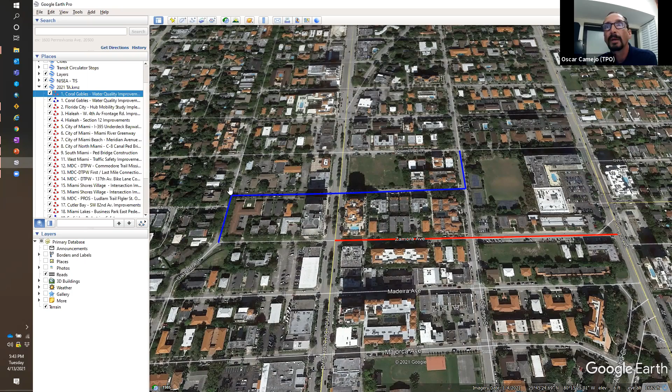Applicant number 2 is the City of Florida City, further south. This is essentially where the eventual BRT will end on Palm Drive. Florida City recently conducted a study through the TPO, a Mobility Hub Study, and identified challenges to accessibility and connectivity in the area immediately surrounding the Florida City Bus Rapid Transit Station. This project will address short-term quick fixes that can significantly enhance safe access to the station, focusing on the transit core with priority given to improvements near schools. They too asked for $1 million, and they're contributing $700,000 themselves.

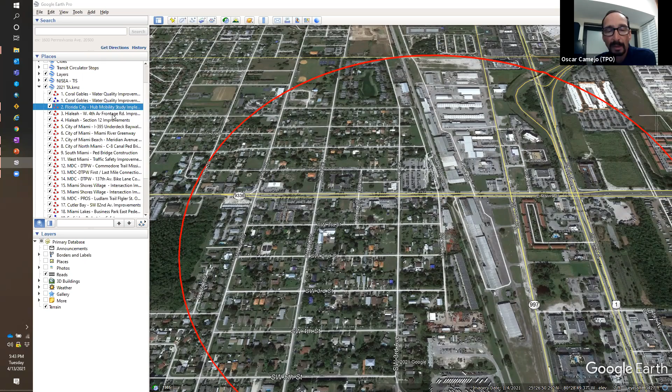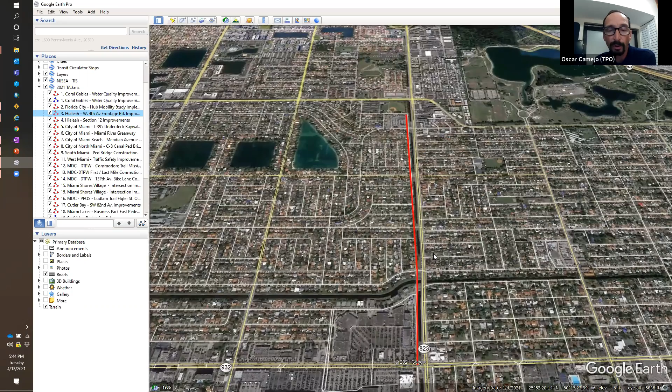Applicant number 3, City of Hialeah, my old stomping grounds. West 4th Avenue frontage road pedestrian and bike lane improvement: add a sidewalk on the east side of West 4th Avenue along the canal and provide a bike share lane from West 49th Street to West 66th Place. The funds requested are $765,000, and they'll be contributing an additional $140,000 or more, for a total project cost of $918,000.

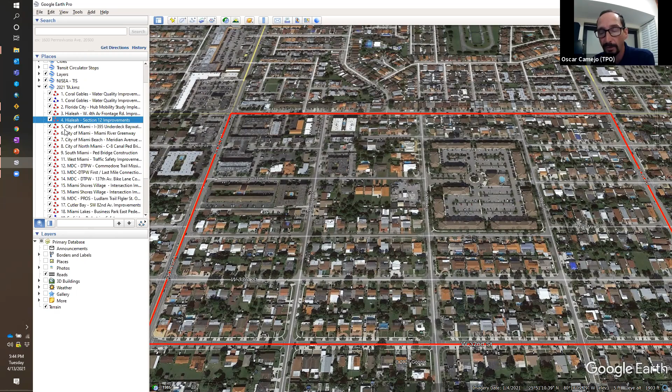Applicant number 4 is also the City of Hialeah, section 12, subsection of their planning development, this big square, sidewalk improvement. Add sidewalk and ADA ramp improvements on all corners from West 12th Avenue to West 8th Avenue and from West 32nd Street to West 37th Street, that quadrant shown here. They're asking for $252,000 and contributing an additional $50,000, for a total of $302,000.

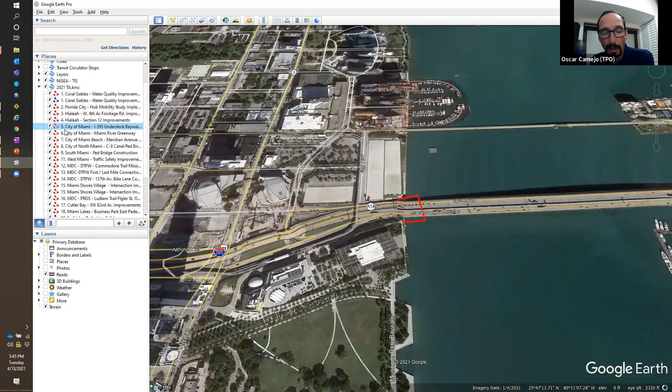Applicant number 5 is the City of Miami. This applicant submitted the I-395 underdeck Bay Walk connection, Northeast 13th Street from Biscayne Boulevard to Biscayne Bay, to connect the underdeck and Heritage Trail to the Bay Walk. The City of Miami intends to expand the lease agreement with FDOT to provide the connection from the Bay Walk to Northeast 13th Street. The connection will be a wide path with landscape elements to provide a safe and attractive connection to the sidewalk. They're asking for $608,000 toward a total of $914,000 project. Someone at a previous meeting asked if it goes over or underneath the highway - it goes underneath.

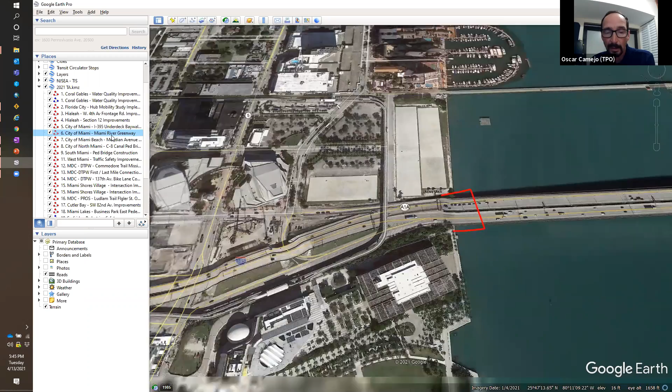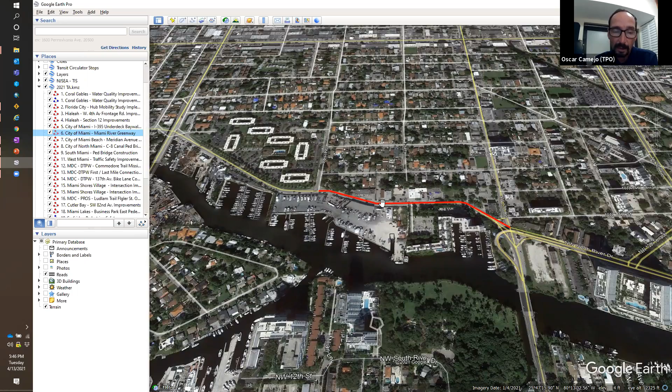Number 6 is also the City of Miami, the Miami River Greenway, Northwest 19th Avenue to Northwest 17th Avenue. It will provide a publicly accessible pathway for bicyclists and pedestrians in concert with the roadway reconstruction of Northwest North River Drive. This public pedestrian and bicycle trail along the historic Miami River will connect diverse multicultural neighborhoods, public parks, residences, historical sites, businesses, and cultural attractions around the waterway. They're asking for $1 million of a $3.9 million total effort.

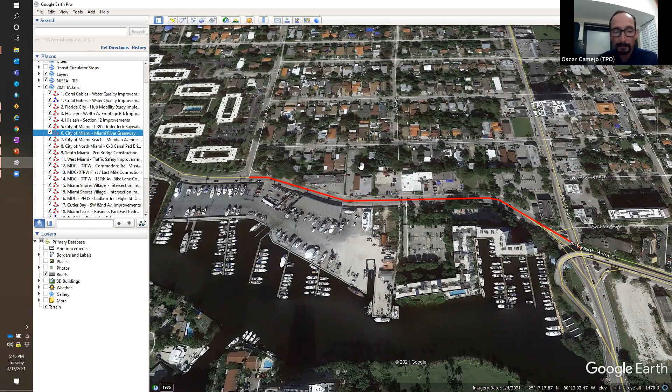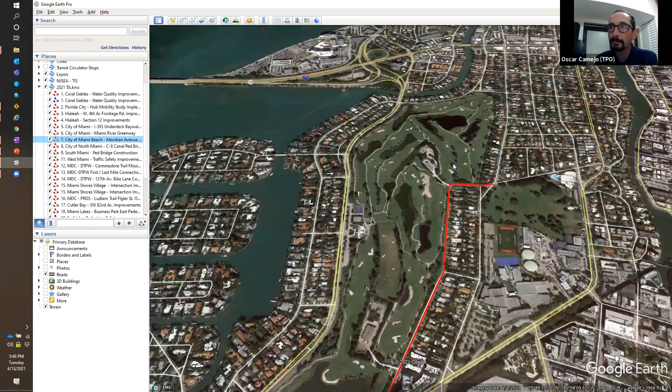City of Miami Beach, applicant number 7, Meridian Avenue Shared Use Path, to enhance the bicycle and pedestrian network in Miami Beach in compliance with the adopted bicycle pedestrian master plan. The project consists of final design and construction of a 10-foot shared use path on the west side of Meridian Avenue from Dade Boulevard to 28th Street. They are seeking $701,000 for a project estimated to cost $843,000.

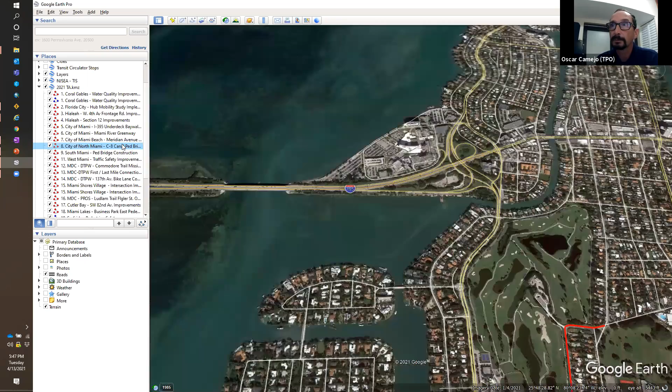Applicant number 8, City of North Miami, titled Pedestrian Bridge Replacement over C8 Canal, also called the Biscayne Canal. This replaces the existing pedestrian bridge over the South Florida Water Management District C8 Canal. The existing bridge is located between Northeast 2nd Avenue and Griffing Boulevard, approximately 1,400 feet south of the existing Northeast 135th Street vehicular bridge. They're asking for $700,000 of the $800,000 total project cost.

Applicant number 9, City of South Miami.

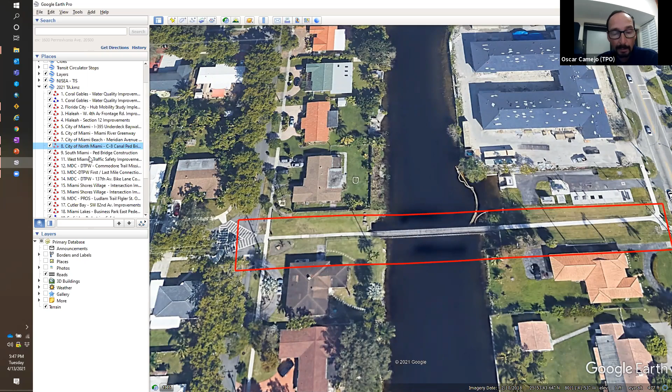This is the South Miami Bridge construction to provide a safe elevated route for non-drivers to travel between the northwest and southeast sides of a 6-lane arterial US 1, through the development of a pedestrian bridge. They're asking for $400,000. The total project cost is $5.4 million. They've received money already before through this program to do the other parts of this effort.

Applicant number 10 is also City of South Miami. However, we don't have an area for them because it's a culvert replacement on Southwest 64th Court over Twin Lakes Canal, to replace the structurally deficient corrugated metal pipe culvert located there in South Miami with a new structure, thus providing greater connectivity between the Manor Lane neighborhood and the existing Metro Rail and businesses in the area, and promoting pedestrian safety. They're asking for $1 million of a $1.25 million effort.

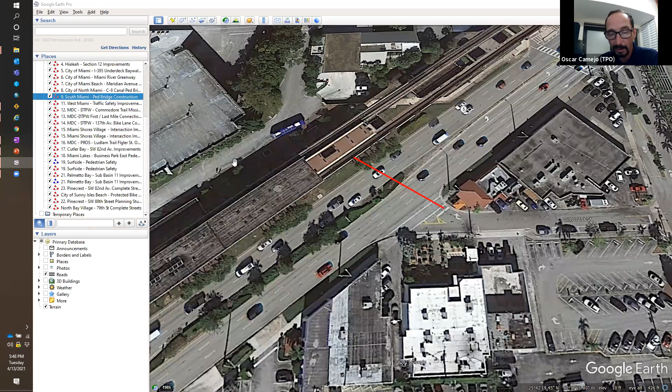Applicant number 11, City of West Miami. West Miami traffic safety improvements to implement the recommendations of a Smart Move study, which assessed traffic and crash conditions in the city at various locations. The project will also improve safety to and from the elementary school by adding traffic circles and crosswalks. They are seeking $415,000 of a $508,000 total project cost.

Applicant number 12, which is the Department of Transportation and Public Works. Commodore Trail missing link, road diet and buffer lanes along South Miami Avenue to improve safety and connectivity for bicyclists that use the Commodore Trail for commuting and recreational purposes. The Commodore Trail is a highly active trail that extends from the Cocoplum Circle in Coral Gables to Alice Wainwright Park. DTPW is asking for $999,000 for this.

Applicant number 13, also Department of Transportation and Public Works, or DTPW. First last mile connection to the Aventura Brightline Station and the Aventura Bus Terminal, to provide bicycle connectivity along West Dixie Highway to the station and terminal. It also aims to improve bicycle travel from Oleta Park through the city of North Miami Beach to Reynolds Park, to the Miami-Dade Broward County line. DTPW is asking for $1 million of a $2.2 million effort.

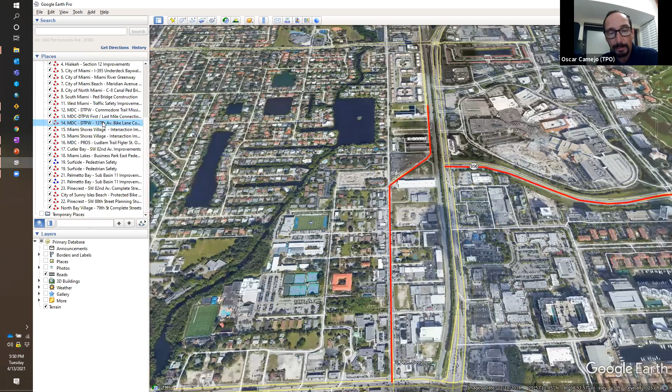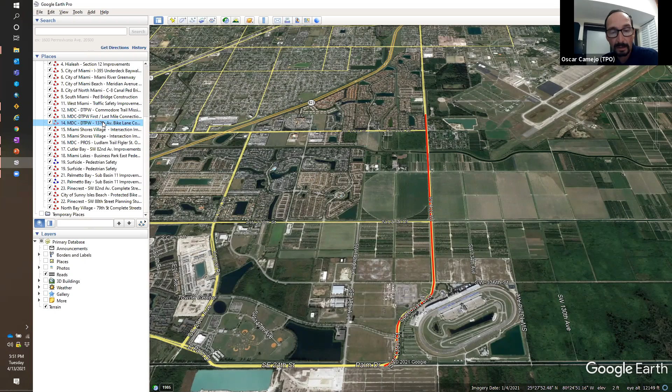Applicant 14 is also DTPW. Highlighting conflict points along Southwest 137th Avenue bicycle lanes, from Southwest 344th Street to Waterstone Boulevard, approximately Southwest 309th Street, while improving the riding surface for cyclists and vehicles. Southwest 137th Avenue is a multi-lane road with a posted speed of 40 miles per hour. They are seeking $943,000. Number 15 is Miami Shores Village.

Intersection Improvement Project: improve ADA compliant crosswalks along the village's local roadways, to improve pedestrian safety along the two main roadways within the village that lead to local schools and a community park. They are seeking $200,000 of a $218,000 effort.

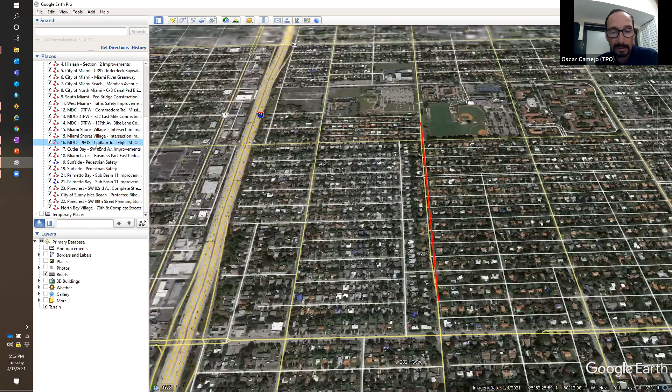Number 16 is Miami-Dade County Parks, Recreation, and Open Spaces Department, or PROS. This is the Ludlam Trail West Flagler Street Trail Overpass, to construct a shared use bridge overpass across West Flagler Street, Florida Department of Transportation right-of-way located west of Southwest 69th Avenue along the Ludlam Trail corridor. The proposed bridge will span approximately 100 linear feet. They're asking for $1 million of a $14 million project.

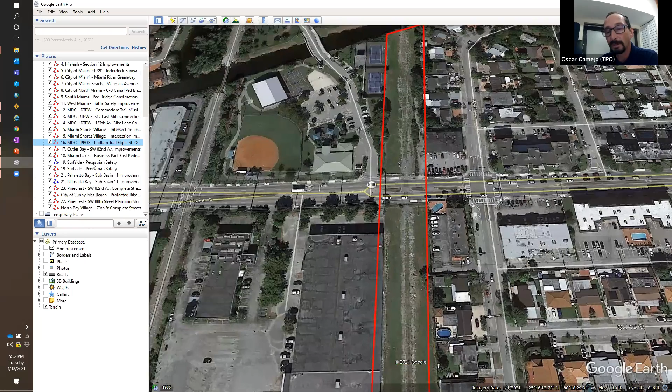Number 17, Town of Cutler Bay. Cutler Bay Southwest 82nd Avenue roadway improvements, to implement traffic calming techniques along Southwest 82nd Avenue from Southwest 184th Street to Old Cutler Road. Plan improvements include the installation of one traffic roundabout, improved drainage as required, new sidewalks to eliminate gaps along Southwest 184th Street, ADA ramps, and painting of bicycle sharrows along the project path. They are seeking $800,000 of a $952,000 effort.

Applicant number 18, Town of Miami Lakes. Miami Lakes Business Park East Pedestrian and ADA Improvements Phase 1 project. Design, permit, and construct new 6-foot sidewalks and pedestrian safety related infrastructure in compliance with the Americans with Disabilities Act, to safely connect people to jobs and industries via shared use path on Northwest 139th Street from Northwest 60th Avenue to Northwest 57th Court, northward to Northwest 142nd Street, including Northwest 59th Avenue, Northwest 58th Court, Northwest 58th Avenue, and Northwest 57th Court. They are seeking $994,000.

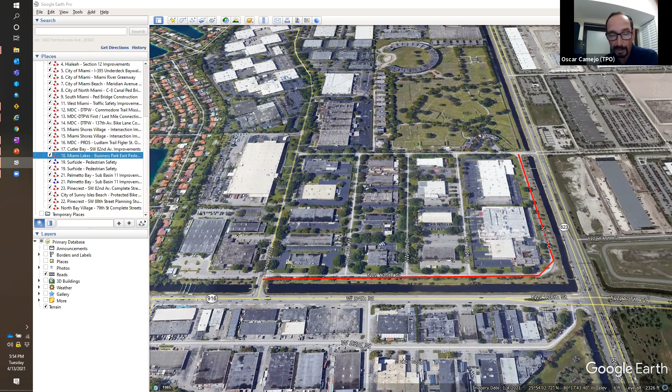Number 19 is the Town of Surfside. This is the pedestrian safety infrastructure improvements to improve and enhance pedestrian crossing locations in the town of Surfside. Specifically, signalized lighted crosswalks and lighted signs per MUTCD at State Road A1A, Harding Avenue, and 89th Street and 90th Street intersections circled there. They're seeking $1 million of a $1.2 million effort.

Applicant number 20 doesn't have a Google Earth because it's a University of Miami School of Medicine and it's a county-wide effort. Sustainability and expansion of the Walk Safe and Bike Safe programs for K through 8th grades in Miami-Dade County. Educate elementary and middle school age children and families on the importance of walking and bicycling safety and injury protection, to sustain and expand the programs countywide. $903,870 is what they are requesting.

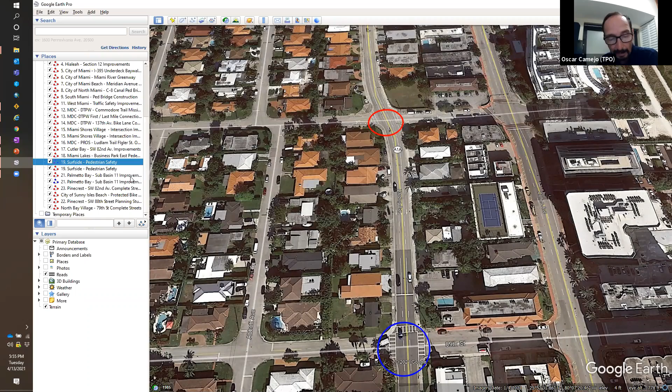Applicant 21, Village of Palmetto Bay.

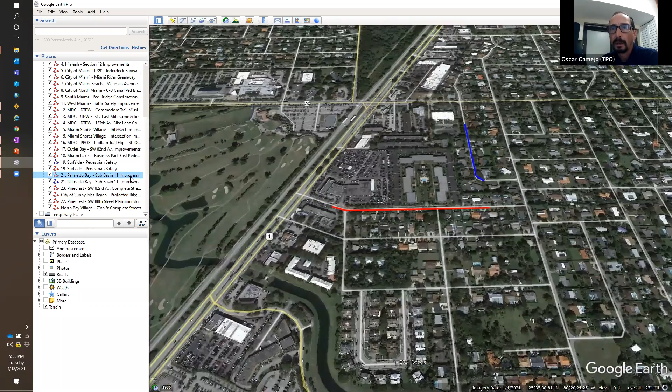Palmetto Bay Subbasin 11 improvements help eliminate flooding to specified roadways and connected side streets in the Village of Palmetto Bay Subbasin 11, which is roughly a 48-acre area of single-family homes and commercial development. They are seeking $1 million of a $1.5 million effort.

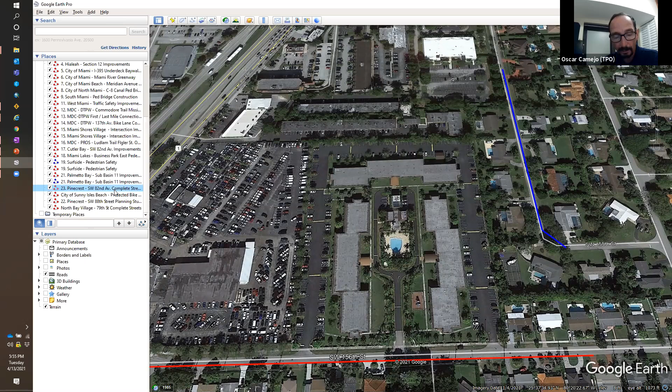Applicant number 22 is the one that was withdrawn by Village of Pinecrest. And applicant 23, also Village of Pinecrest, is Southwest 82nd Avenue.

This is a Complete Streets Planning Project to conduct a planning process with residents and stakeholders on the best form of complete streets for this corridor on Southwest 82nd Avenue from 120th Street to 136th Street. They are seeking $75,000 for that effort.

And that completes my description of each of these applicants. I do have the complete packages here, and of course they're available online if anyone has any questions.

Kevin, can I ask you a question? Go ahead, Hank. I apologize for coming in late, and hello to everybody, thank you for letting me get back on the BPAC after I resigned. It's good to be back. Yeah Kevin, we even had a slide for you at the beginning of the meeting, but you missed it, here it is now. Oh, thank you.

Kevin, it's no secret that I have a very prominent interest in the Commodore Trail. So how do we handle this? Am I allowed to vote on any of these, just not vote on the Commodore Trail? What's the procedure? That is a good question. I'll give that to Oscar because he's been doing this. I do not know if we have anything where somebody has to recuse himself because of personal interest. How have you done this in the past, Oscar?

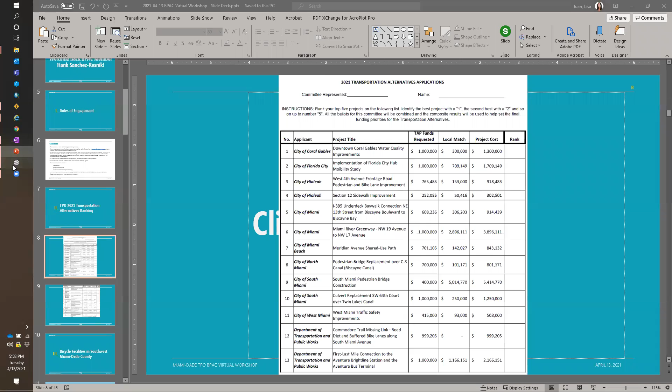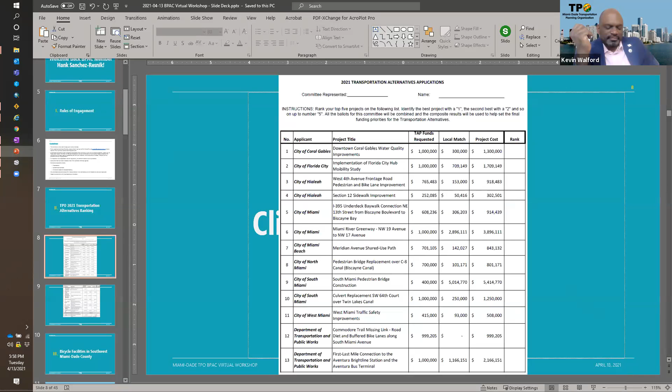Anybody have any questions? Brett? I know Eric sent his comments in, but for the record, Eric, I'd still like you to at least mention some of them at the workshop. Brett, you're going to say something? No sir, I have no questions at this time. Thank you for the opportunity.

And you saw that the application materials for the Miami River Greenway project were available for you to pick up, correct? Yes, and I appreciate that.

Okay, so if everybody could please fill out their forms and send them to Kevin tonight at the latest. Unfortunately we tried to get this in at the last meeting, but we didn't have the Google Earth ready, and today's the deadline, so if you guys could send those in, it would be greatly appreciated.

And remember, you only have to rank the top 5, you don't need to rank all 22. Just vote: your favorite one gets a 1, your second favorite gets a 2, and so on until you rank 5.

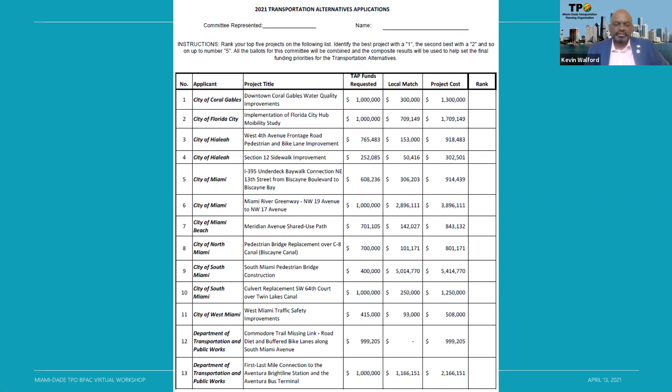Let me just double check to make sure nobody else has joined the meeting. No, it's still the same 3 members so far: Eric, Hank, and Brett. Okay, so once I receive... you only need to be present to participate? You do not need to be present to participate since you sent them out earlier anyway. No, everybody was told they had until today at the meeting or afterwards, so whatever emails I get tonight before midnight, those will make it in.

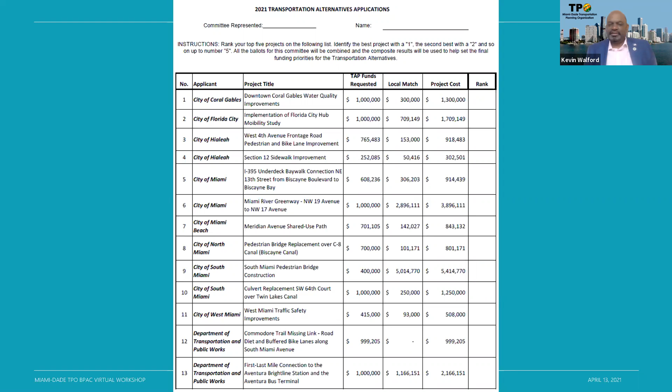All right, thank you, then no other comments being asked. Thank you very much, Oscar. Thank you, all right.

Next, we have bicycle facilities in Southwest Miami-Dade County by Eric Tolberg, who's one of our BPAC members. All right, so Eric and Lisa, you take the technology.

Eric, would you like to start sharing your screen? I believe I have, hold on, let me. Can you see anything yet? No, not your screen yet. Sorry, I have to get out of it. I can't kill it. Let me stop sharing and then you can start sharing your screen. Oh, here, end show, I've got it. Okay, share screen.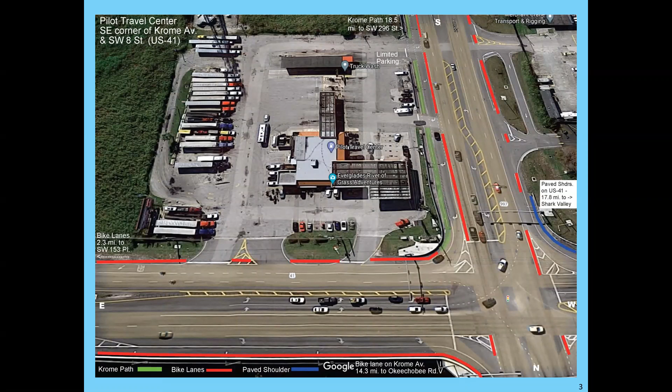This is Kendall Drive. This is the view west from Southwest 88th Street, 500 feet east of the Krome Path. Notice the very narrow shoulder on the side of the road, which disappears at the guardrail, and there's no place to park at the shoulder. Now, I understand there are plans to build a sidewalk or path on the south side of the road, but there's no place that you can access the Krome Path yet.

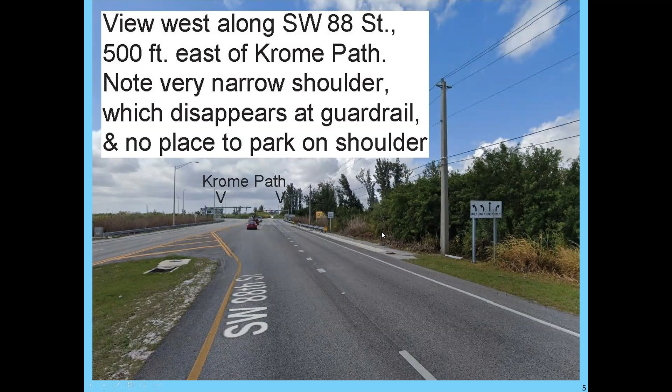This is the view west from Southwest 157th Avenue along the gravel road south of the C1W Canal, which is 2 miles to Krome Path. No parking is allowed at the entrance right here. There's a 35-inch gap next to the gate.

This is West Kendall District Park on the left. It has a paved jogging path and grass parking area that you can use to park to access the Krome Path.

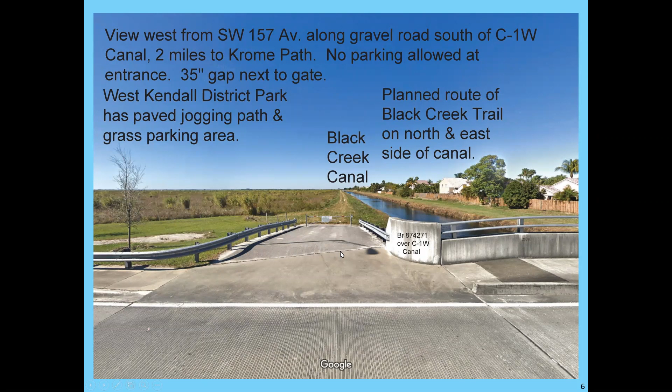This is an aerial view of the West Kendall District Park. Notice the grass parking area over here. You can put a lot of cars there and then take the jogging path up to the gravel path that goes to Krome Avenue. So if you've got a lot of people that you want to have a ride, you go onto the Krome Path - you park on this grass parking area just off of 157th Avenue, and you can access the gravel road to Krome Path.

This is next to the C1W Canal. This is very close to Southwest 120th Street and roughly in line with 112th Avenue, 112th Road.

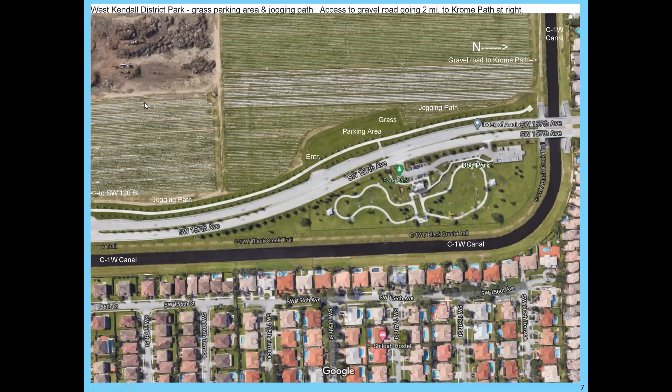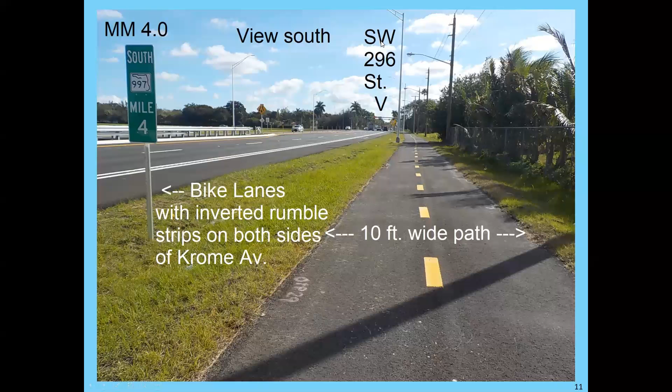This is Southwest 296th Street where the path ends. And this is the end of the path at 296th Street. There is a rebuilt sidewalk to Southwest 312th Street, but unfortunately, the bike lanes from this point to 312th Street were removed when Krome Avenue was widened.

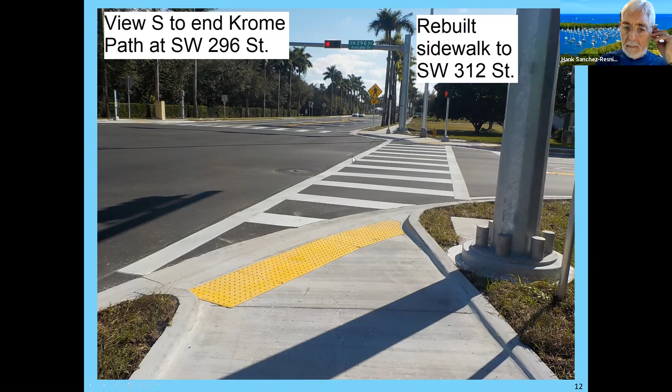These are some other bike facilities in southern Miami-Dade County. Can you see the A there? That is Southwest 328th Street. It's 1.4 miles from US 1 to Southwest 162 Avenue, and that has both bike lanes and sidewalks. The second one is B, which is only 0.4 of a mile long, which also has bike lanes and sidewalks. But this is important because it is part of the Biscayne Everglades Greenway.

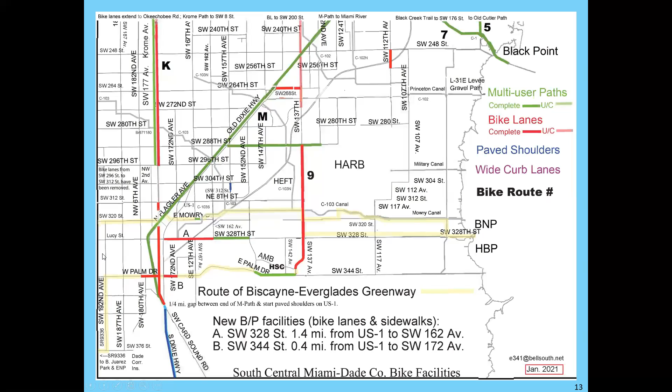The Biscayne Everglades Greenway path is shown in yellow, and you can see it comes up here and then along Palm Drive. This is where it uses Section B and goes to Biscayne National Park and then west to Everglades National Park. In your agenda package, you got 4 different bike maps.

You got one of downtown Miami and Brickell, one of southeast Miami-Dade County from the Miami Airport to Homestead Air Reserve Base. We just talked about the Krome Path from Southwest 8th Street to Southwest 296th Street, and so it includes all of Southwest Miami-Dade County. And finally, there's one of South Central Miami-Dade County, which goes north up to Southwest 248th Street.

That's the end of my presentation. Are there any questions?

Sorry, I didn't see a hand raised, but this is Tiffany with FDOT. Yes, go ahead. Yeah, excellent presentation.

And I do want to emphasize that on Kendall Drive, we are looking into the feasibility of a shared use path on the south side of Kendall Avenue, especially Kendall Drive, to connect to the sidewalk that's existing there, but preferably if we can, I'd like to see a continued and cohesive shared use path. Something that would mimic the Krome Path, for continuity's sake.

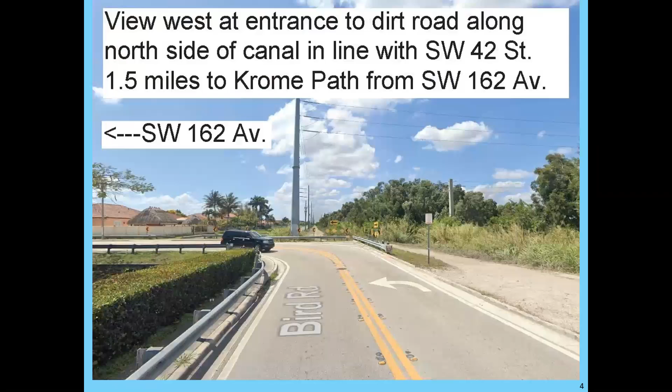There, in that picture you had. You see right there, 8th Street. That segment there, that one to 157th. We especially want to look at that and see if we can create a safer connection to Krome Path. Yes, there are bike lanes there, but they're on a 55-mile-an-hour road.

So they're not suitable for anyone but expert cyclists. I would hope that they could build at least an 8-foot sidewalk and preferably a 10-foot path. Well, sidewalk is okay, but I'd prefer we use asphalt for the smooth surface. For me, when I bike on the sidewalk, it's not the most comfortable thing. You've got the bump, bump, bump, bump as you hit the ridges.

So if we could, I'm going to be looking into something that's more cohesive, something that goes along and plays off the Krome Path. But yeah, excellent presentation, very informative.

Okay, thank you. Anyone else? Yes, go ahead, Brad. Me? Oh, sorry, Hank. Go ahead. Hank? Yeah, I just wanted to thank Eric for doing that.

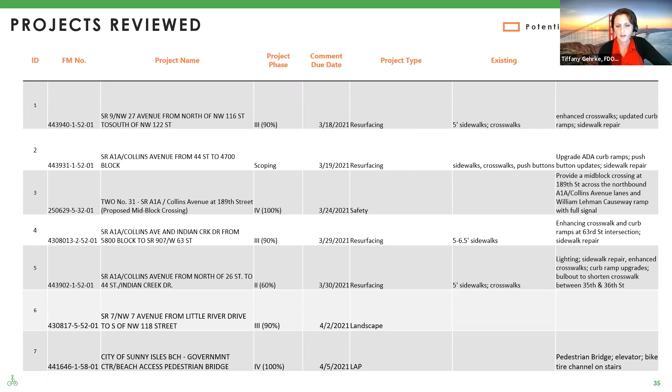We also have a landscape project on Northwest 7th Avenue from Little River Drive to south of Northwest 118th Street. And the one I didn't mention here was a safety project on Collins Avenue at 189th Street - this is a proposed signalized pedestrian crossing. We can go to the next slide - I'll mention and show you more about the pedestrian bridge.

I know I've shown this one multiple times, but it's not 100% yet, and I'm very excited about this project - I know many of you are too. It's the Collins Avenue and north of Haulover Inlet stretch, right in front of Haulover Park.

This is going to include buffered bike lanes with green conflict zones, a shared use path along the water side, and enhanced crosswalks. There's an additional mid-block crossing and ADA curb ramps. This is a really exciting project - I'll show you a little depiction of one section of it.

But if you're interested in seeing all the plans, I can definitely send those to you. It's at 100%, so it's pretty much final, which is good because I'm excited for it, and I think we have a lot of good features included. And then we have a bridge repair project at Port Boulevard.

We also saw within our review process an operation project to improve traffic flow by modifying the signals and adding additional turn lanes at Krome Avenue and Kendall Drive. It's similar to a location Eric mentioned, and it overlaps with what we're looking at for the shared use path, but this project will not impact that. It won't include any of the things we're looking into—it's separate, for traffic operations. We also have a project for the Northwest 59th Avenue roadway extension and redevelopment.

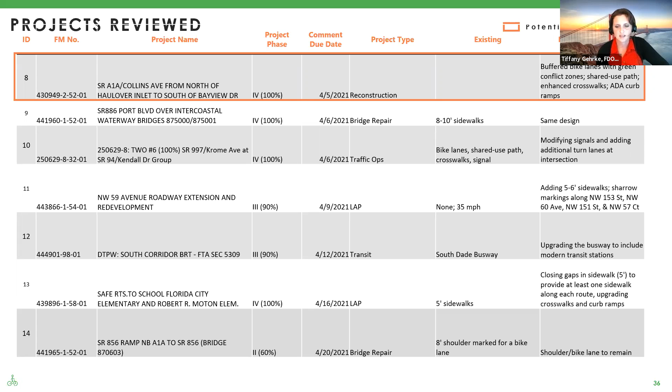But that's not included in this project. This project will create the same typical section as existing—it's just for bridge repair. You can go to the next slide.

You can see here the proposed mid-block crossing at 189th Street. In the current condition, it doesn't have a signal, so as you can imagine with this configuration, it would be very difficult to cross. So what we're doing is adding something signalized so cars will stop and that free flow movement will stop as well. We can go to the next slide.

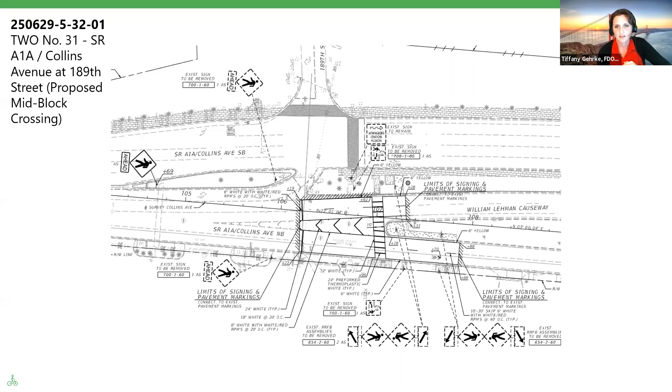This is that depiction I mentioned I hope to see more of in future projects—a resurfacing project on A1A near 36th Street. What I like here is that we're creating a bulb-out to shorten the crossing distance. It also brings the person waiting on either side closer to the point of view, so drivers can clearly see the pedestrian waiting in the crosswalk, encouraging them to stop even more. This is a nice feature, and I hope to see more like it.

Now, as Eric mentioned in comments, technically it is legal to cross wherever there's an intersection. However, in this configuration it'd be very difficult to do that, given there's no signal. So you could cross across A1A at 35th, but it would be very dangerous given the 3-lane roadway and no signal at that point. To create a safe crossing there, we'd have to add a full signal across 35th or 36th. Traffic ops has not deemed that warranted at this time—I don't know if a study was done, but it hasn't happened yet. We can go to the next slide.

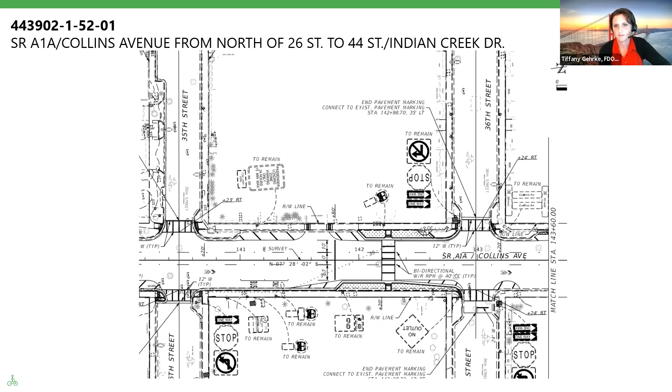This is the Sunny Isles Beach Government Center to Beach Access pedestrian bridge—I know I've shown this to anyone who's been at the same meeting before. What I like is that they incorporated the channelized steel, or the steel bike tire channel, that we recommended—very happy to see that. This will also include a stairwell and an elevator, a nice added feature so people can more easily walk their bike up the stairwell.

We can go to the next slide.

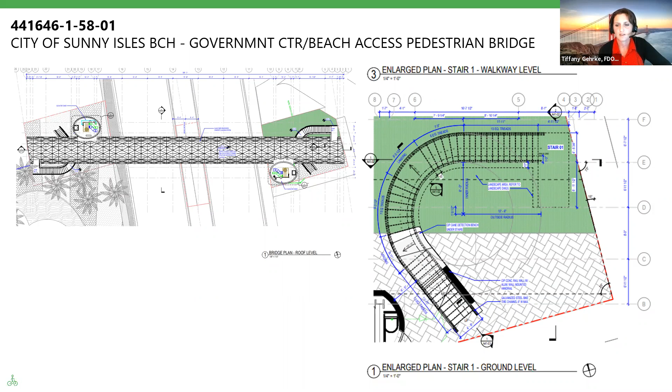This is a short segment of the Collins Avenue project adjacent to Haulover Park. You can see the shared use path on the east side here, at the bottom of the screen. And then there is the buffered bike facility with green conflict zones, and a sidewalk on the west side. It's going to have some landscaping and be quite a beautiful project, hopefully by the end. Unfortunately, this project segment does not cross the bridge, just shy of it, but perhaps in the future we can add to this and connect it fully.

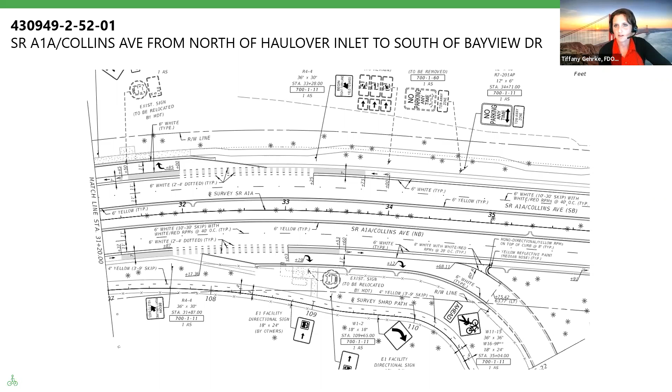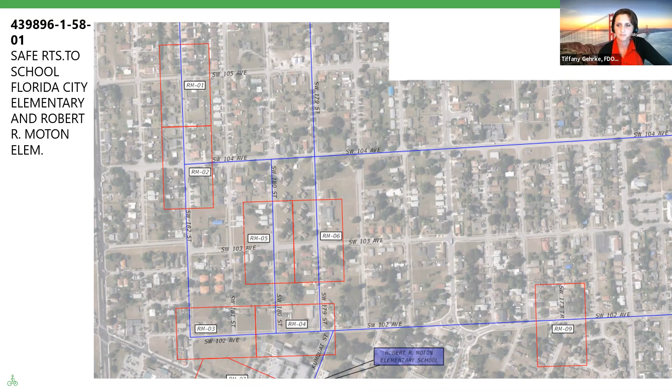This is your general locations. The red blocks are the locations where the LAP project is doing safe routes to school improvements. I wanted to share this so you could see the areas being improved. Like I mentioned, the improvements within these safe routes to school typically include filling in a sidewalk gap, at least on one side of the roadway, and upgrading the crosswalks and curb ramps to ADA compliance.

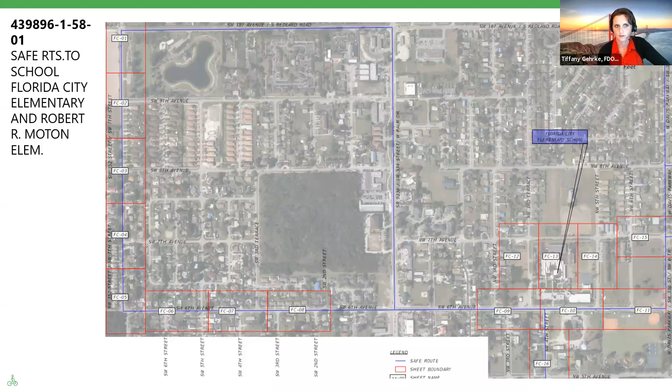So that is the Robert Moton, and then this is the Florida City locations.

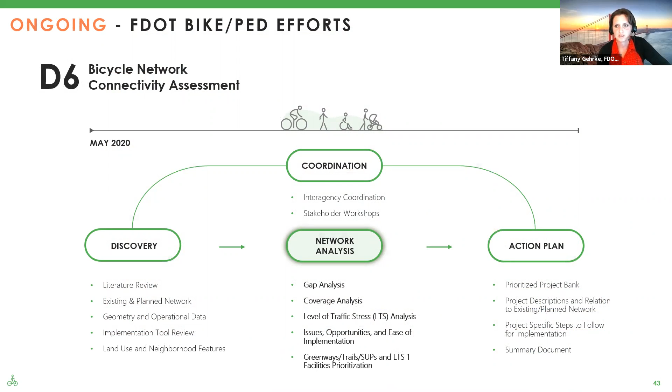I just want to give you an update. We are continuing to work on the bike network plan. Right now we're working on the prioritization, and what factors will contribute to it. Thank you all. If you have any questions, don't hesitate to ask.